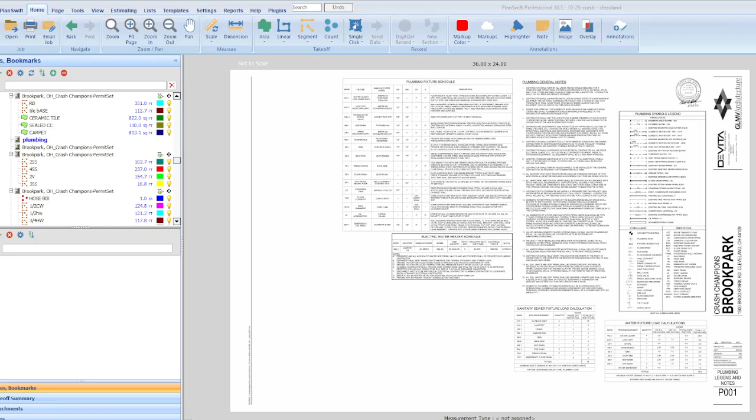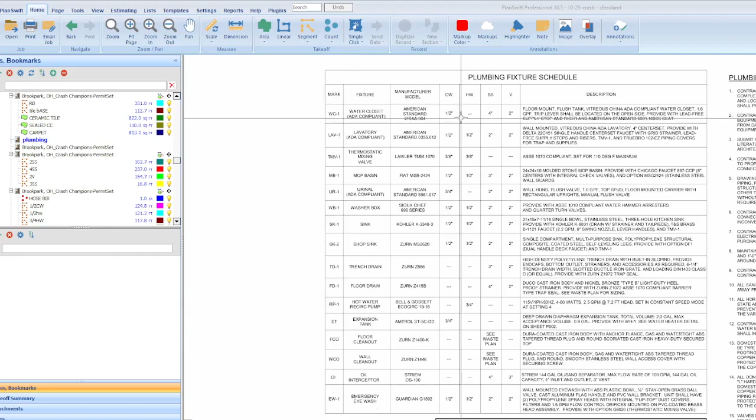Okay, so this is the cover sheet for the plumbing set, and it's going to give us all of our plumbing fixtures, everything that we're going to be installing, and it will give us the size of the hot water, cold water, and the sanitary pipe sizes and the vent size. And so that's important when it comes to your rough-ins.

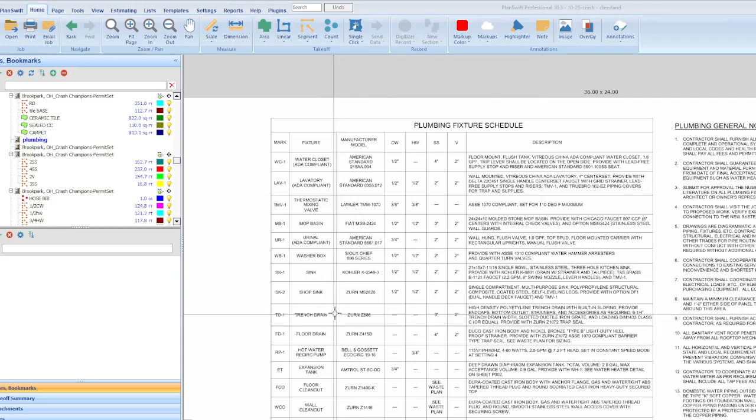And so we know that if we're going to install plumbing equipment for the very first time, we need to add to our estimate what's called the rough-in cost, and that is the additional cost to install the hot water, cold water, and sanitary systems to that piece of plumbing equipment for the very first time. So you always have to consider that, in addition to your plumbing fixtures themselves.

And so if you have a good cost book, it's going to give you the cost per type of fixture, and of course the man-hour units that it's going to take you to install that. So please never forget that, and it's specific to only new construction. If you have a renovation, it doesn't apply. So if you're going to just take one water closet out and install another in a renovation, that would not apply. So rough-in costs only apply to new construction.

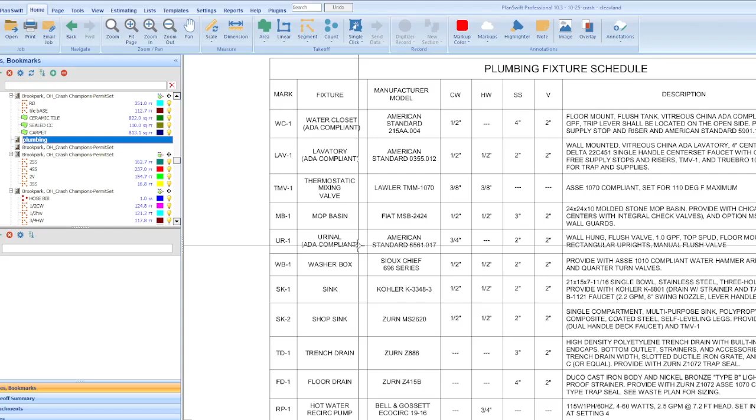And so here are your fixtures, and then all your typical symbols. We're going to replace a water heater, so this is a good idea of all the things that you're going to have to find the prices for.

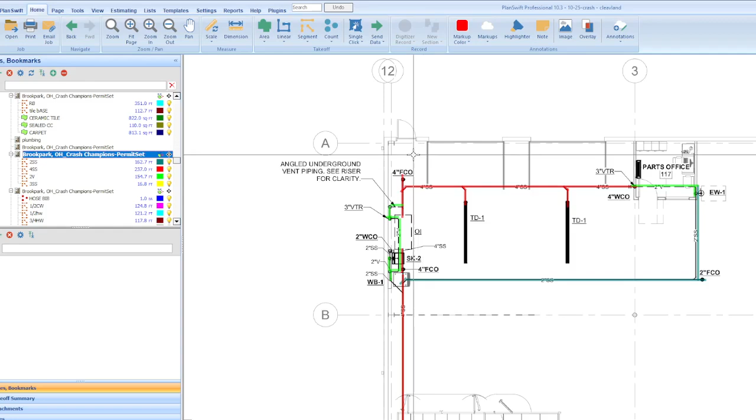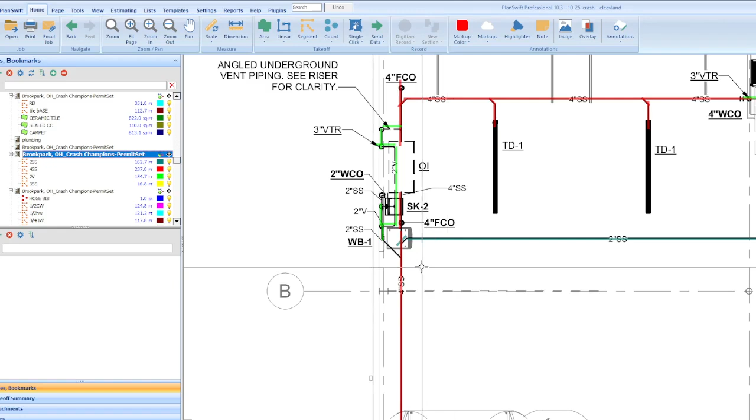And as we know, just like for the electrical set, there are two plans. There's one for the sanitary and vent system, and then there's another one for the water, gas, and whatever other systems are appropriate to this type of building and what these people are doing inside the building. Because this is our set of auto repair shops, for the plumbing set we'll have a compressed air and a gas line as well.

Okay, so this is the sanitary system. Of course, we have to have a good tool that's going to measure linear feet, because our piping is in linear feet. And so if you have a good cost book too, you don't have to really consider angles and reinforcements, because all of that is considered in the price. If you do the assembly price for plumbing for that type and size, it's going to include all of the supports, any angles that it assumes you need, because based on industry standards, it has to be supported at certain lengths.

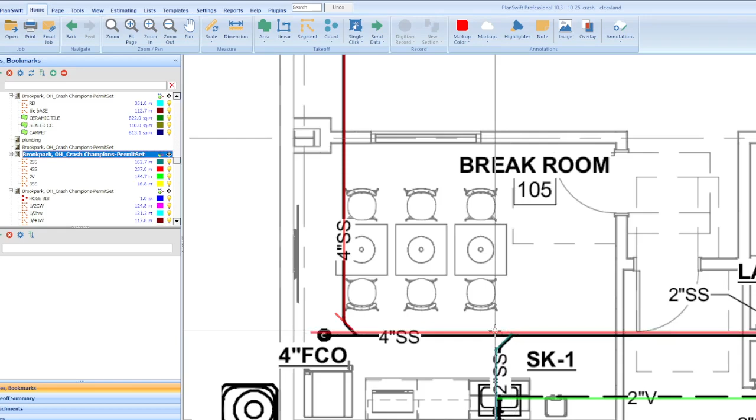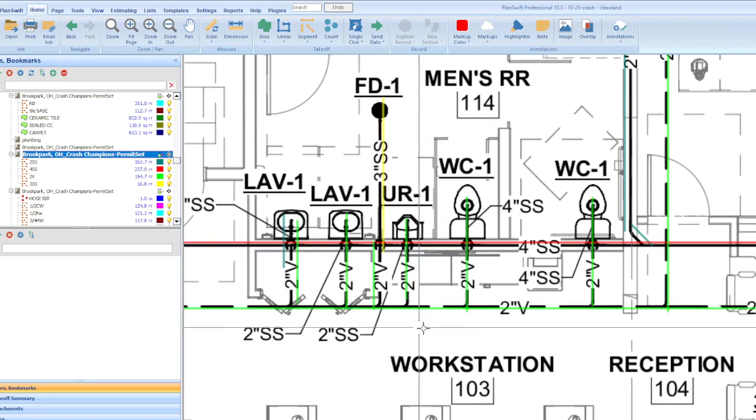And so if you have a good cost book, that'll help you eliminate having to do the small little things, especially if you bid a lot, right? And so always, when we bid a lot, we're going to use a cost book. We're going to use a very good digitized software to make our measurements. But if we win, then we go back and we do a very good detailed overview of what we've done to make sure that price is appropriate. If it's more than 30 days, you have to look at the material cost again to make sure it's the same and that kind of stuff.

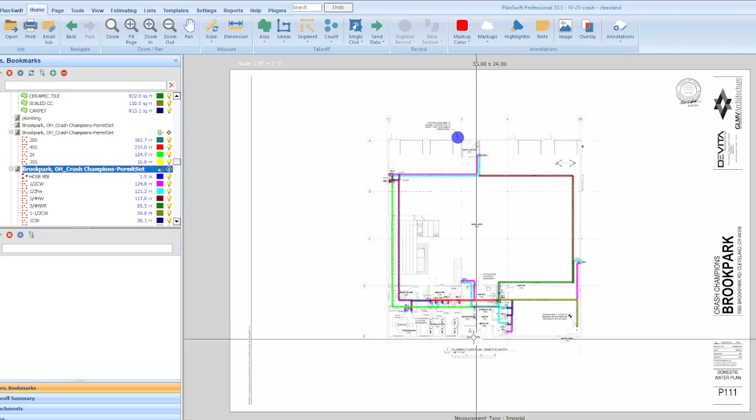So okay, the plumbing plan, we take all of our linear measurements, and don't worry about the fixtures, because we're going to use this riser diagram to count all of our fixtures. Okay, so we use all the plans to measure our linears. So that's sanitary and vent, and then the other plan is for all of the cold water and hot water piping, running to the same fixtures, of course. And so we just have to have a good tool to measure linear.

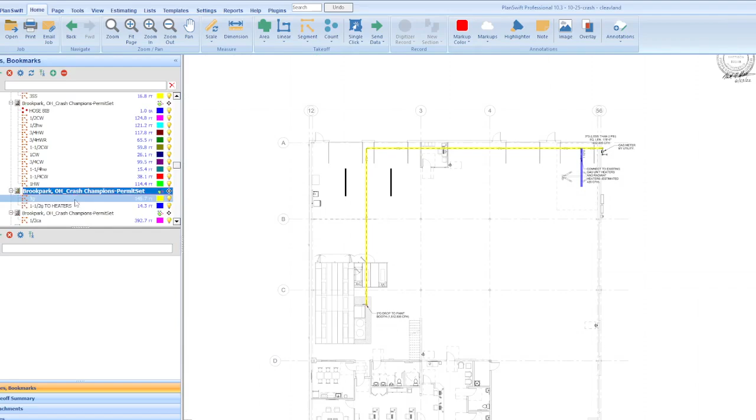And then this one has gas line, and so same thing, just linears and compressed air. Now when you have something like this, it's a 1/2 inch compressed air line, and for this one they wanted us to use black steel, and then a control, but this indicates we don't know where the end of the line's going to be.

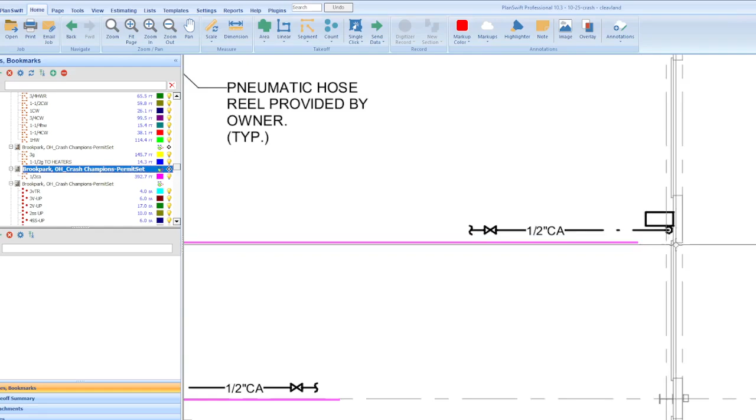And so in that case, you have to give them something. And so what I did is just give them to the end of the building. It's got to be somewhere within the building. At least you give a good allowance, and then you let them know that as well. Okay. And so now the riser diagrams.

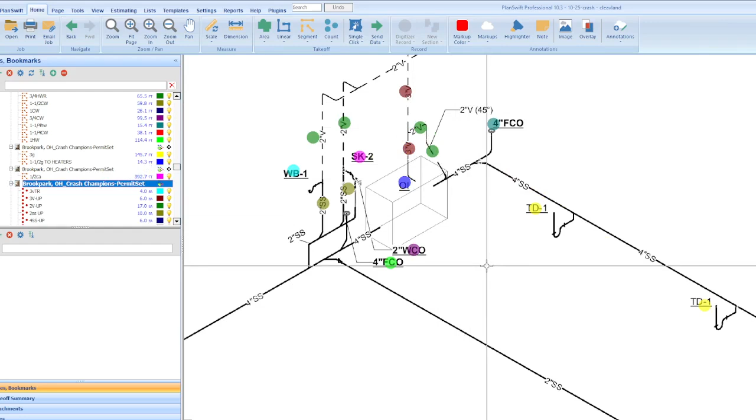You use the riser diagrams to determine the vertical measure of pipe, because pipes go up and down, right? And your plan only shows you the horizontal measures of the pipe, that at certain locations the pipes are going up and down. And so that's what the riser diagram helps you determine, the size and going up. So rule of thumb I always use is typically 10 feet per going up. So 10 feet, 10 feet, 10 feet, you know what I'm saying?

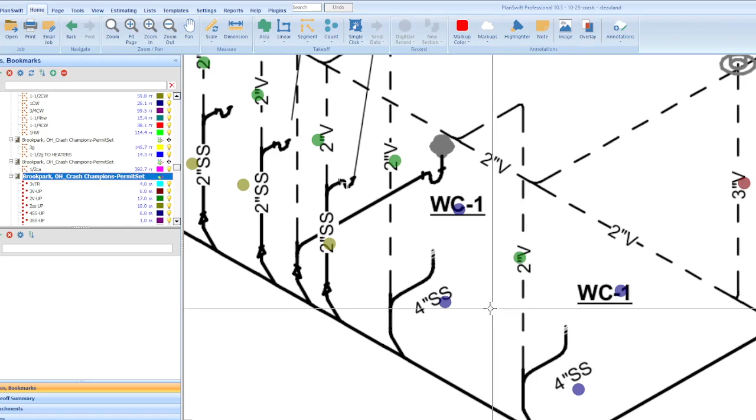So that's how you determine, and that's why I put a dot on each one. So 2-inch vent, and every time I see that, okay, so I know I've added 20 of them. Well, I know that's 200 feet of 2-inch vent vertically. And if you have a good cost book, it will give you a different cost for a horizontal assembly price as opposed to a vertical assembly price. So you want to look out for that too.

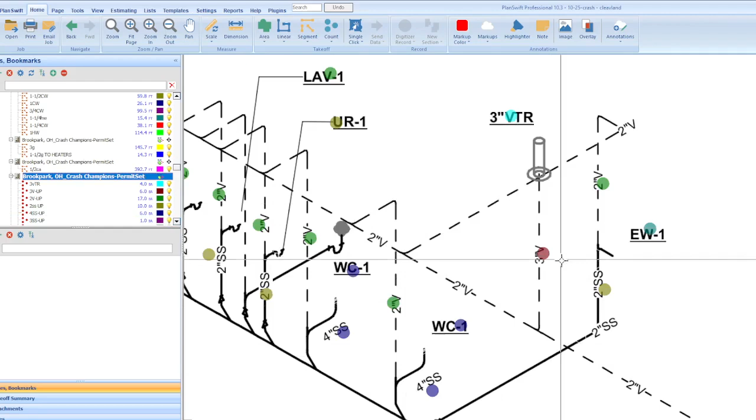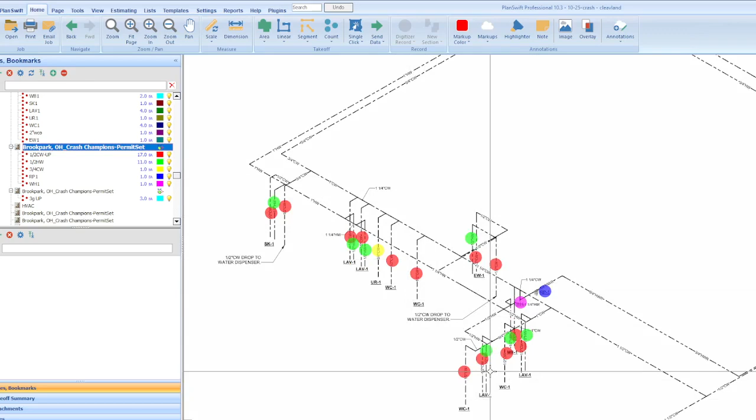But the other thing is you can use the riser diagrams to count all of your plumbing equipment and be very accurate. I always like using it from the riser diagram. And remember, you're going to have different risers. So you have a gas riser, you have a sanitary riser. It's typically going to be the same things that you're counting, so you don't have to count it twice.

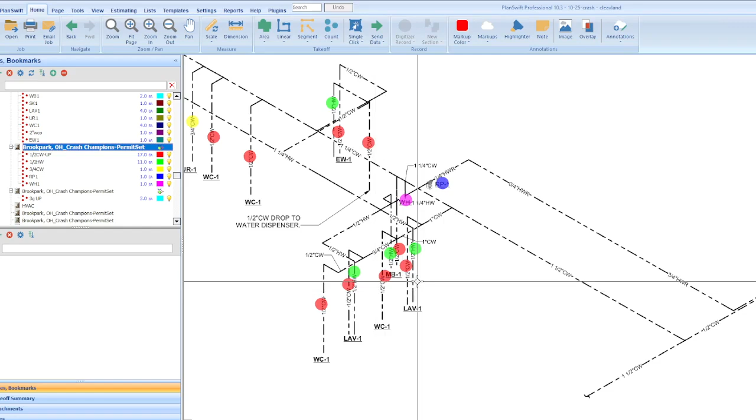But look in the water plan, like if there's a water heater, that's not really sanitary, so it wouldn't be on the sanitary riser, it would be more on the water riser. So things like that you need to look out for. Or if it's an oil interceptor, which is a sanitary system type thing, it would only be on the sanitary riser and not on the water riser. So those are kind of little things you need to look out for.

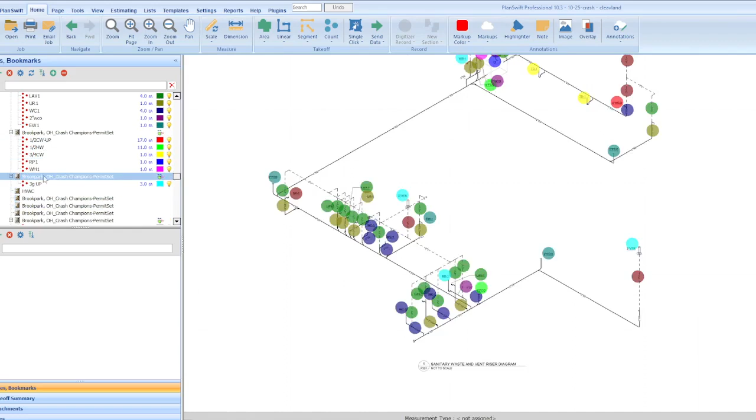But other than that, you could just use one of the risers to do all of your plumbing equipment counts, and all of your vent to roofs. Okay, and then there's a gas riser. And see, all of these measures are on your plan. The horizontal measures are all on the plan, so you don't have to measure that. Riser diagrams are just to show you where the vertical measure up and down is.

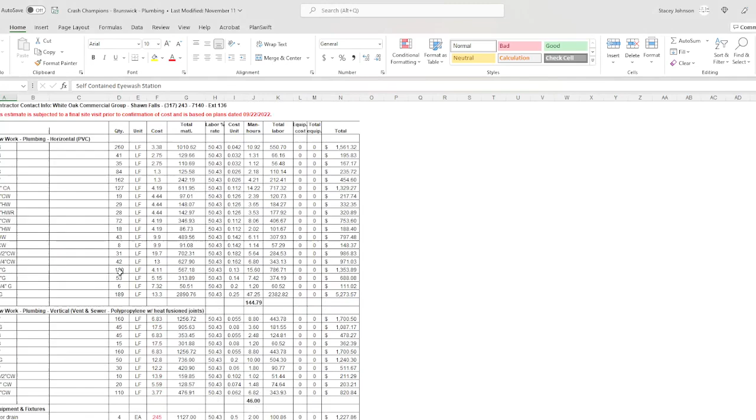So when you put your estimate together, this is basically what we do. And of course, we love detail. So all of the horizontal work, and it says PVC, but it's not. I mean, sanitary is PVC. The water is copper. Okay, so that's all the horizontal measures of pipe and how many linear feet. And then this is the vertical measure of pipe and how many linear feet.

And then, of course, all of the fixtures, right? The cost, and then the rough-ins that apply. And then, of course, we're always going to add a cost to connect the existing waste, vent, water to the new service. And then the vent to roofs, and all that little stuff. And you want to check your specifications, because you most likely have to have insulation for the pipe. Okay? And testing the system, especially with plumbing. Okay, so you want to break it down in very good detail.

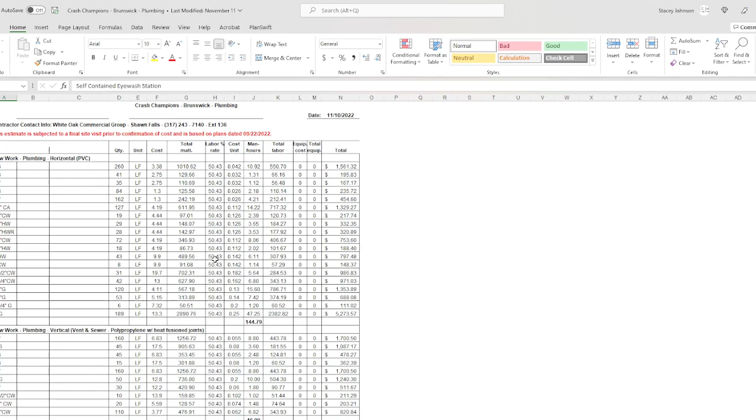Again, just each of the measures, how to determine up and down the walls, and the rough-in cost. Those are things that are important that you have to make sure you include. That's not necessarily on the plans, right? So you know you have to include that, and then testing and flushing the system.